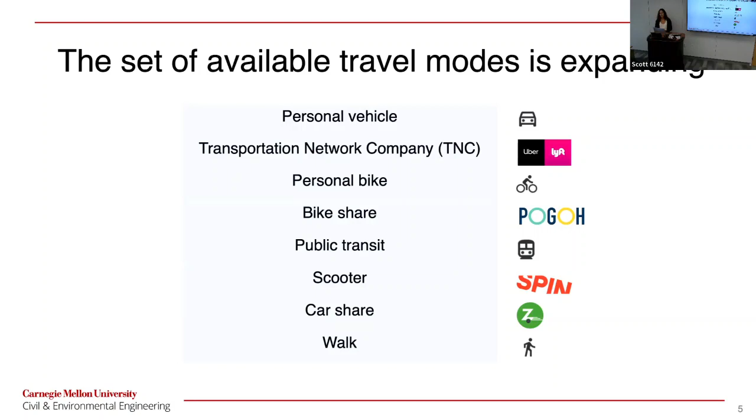In general, I think we can all agree that our decision to take one mode versus another reflects cost trade-offs. For example, you might think, what is the monetary cost in terms of dollars? Many times I would love to take an Uber or Lyft back from the airport, but it's expensive, so I don't. I take transit. But transit's not necessarily often reliable.

You're wondering when you decide to take PRT, well, will it come on time, and will it be too full in the winter? Sometimes you may also want to bike or take a scooter, but you may be worried about the risk of the path. So in general, for this research, we said, well, a traveler considers 5 cost considerations, those being travel time, the price, the risk, the reliability, and the discomfort. And then, each one impacts your mode choice differently.

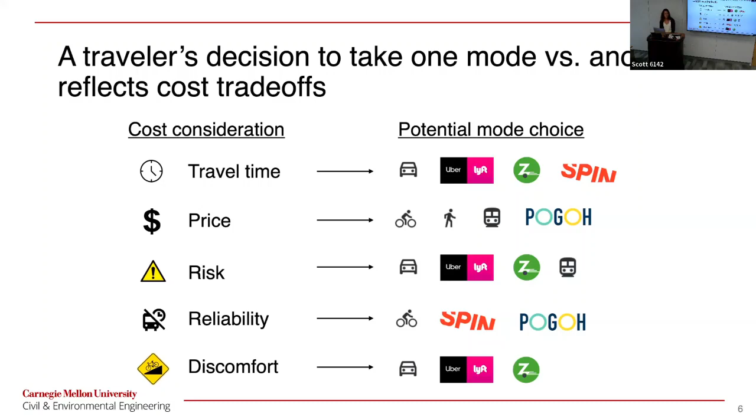Okay, so the objective of minimizing total cost can lead to the construction of multimodal routes. So here we have a contrived origin-destination pair. We have Hazelwood Green in the bottom, going up to Mellon Park. So we have different cost trade-offs. So a potential multimodal route, let's say you're down here at Hazelwood Green. If you actually try to go to Mellon Park by public transit, it's not a good option. You'll have to transfer bus lines, and the whole process will take you 45 minutes on a good day.

Well, what if there's a bike share station nearby? You may want to solve your first mile problem by taking a bike share, maybe biking a mile or two, and then getting on public transit for your final segment. Alternatively, you could take transit for the early segment and then a Spin scooter to your final destination, or no transit at all, maybe taking something like a Spin scooter to a Zipcar. So these are just possible multimodal routes that can be considered.

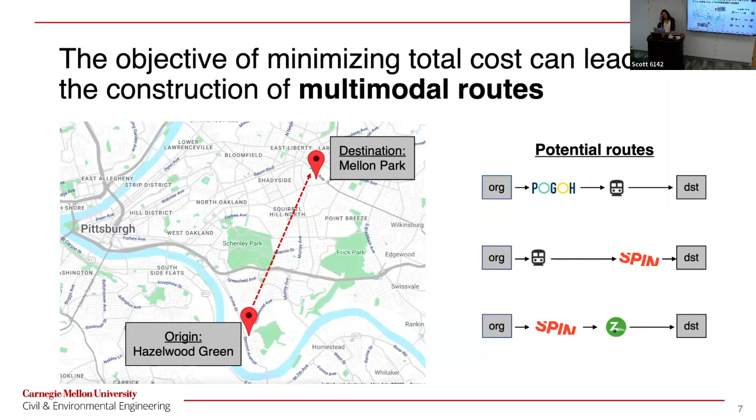But the issue is that real-time routing is typically conducted for single mode, single cost travel. So single mode being one travel mode, whether it's car or transit or biking. Single cost being just travel time, so not considering all of those other costs that I had mentioned previously. So here's the familiar Google Maps interface. So if you want to go from Hazelwood Green to Mellon Park, you have to choose which mode am I using. So here, let's say you selected the private vehicle.

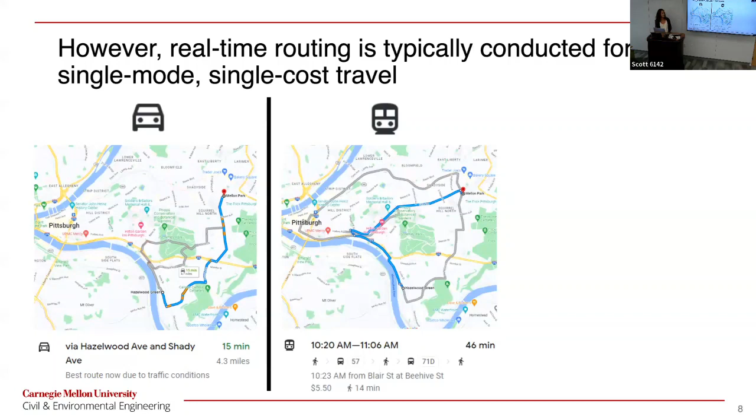Well, it returns a route to you that takes 15 minutes, so it's optimized for travel time. Alternatively, you could select public transit, and it shows you what seems to be a rather inefficient route, but you are constrained by the PRT's network structure. So it triples the travel time relative to private vehicle, or you could select biking, and it also gives you a route.

So moreover, previous accessibility research considers single mode, single cost, single time of day travel. So accessibility metrics aim to capture how well a city's transportation network facilitates access to important destinations. So one such metric that's very commonly used in practice, because it is quite interpretable, is called this cumulative opportunities metric. So here's a map of the Pittsburgh neighborhoods. We'll say we're just considering one neighborhood center, the red star. And then we have various points of interest around.

So if you want to know how accessible are these points of interest, what this metric will do is you say, okay, well, you're a transportation planner. You have to set a travel time threshold, let's say 20 minutes. And then you count the number of, quote, opportunities reachable within the travel time threshold. So let's say these black markers are jobs, and your travel time threshold is 20 minutes. Well, then the cumulative opportunities metric of accessibility to jobs for this neighborhood center is 1, 2, 3, 4, 5, 6, 7, 8. So very, very simple metric to calculate, and like I said, for that reason, it's often used in practice.

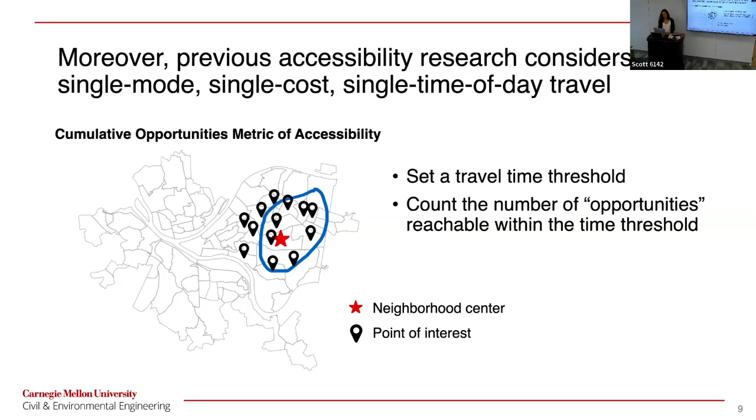So that said, we want to try to evaluate accessibility in a multimodal network. Our research objective is to develop a multimodal network modeling framework to measure accessibility that considers a diverse set of time-dependent travel costs and travel modes. So a lot of words there, but what we're trying to do is develop this model that considers all of these travel modes at the same time. So develop a model that allows for multimodal routes, considering bike share, scooter, TNC, or transportation network companies. Considers these 5 travel costs: the time, price, risk, reliability, and discomfort.

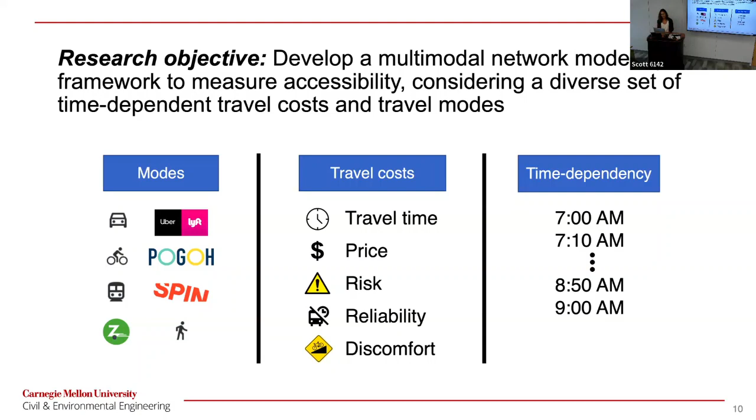And then evaluates accessibility at many points in time. So oftentimes you see accessibility just measured at 8 a.m. or peak morning, or at 5 p.m. peak evening. So we want to do this at almost a continuous time. So hopefully that was properly motivated why we want to develop this model. Now I will show you how we actually do that. So I'll start with some steps, and then I will show you some images.

So steps for designing this network model. So first we build unimodal graphs for the study area. I will show those soon. And then we will connect these graphs by transfer edges to build what's called a super network. That's a routable multimodal network model.

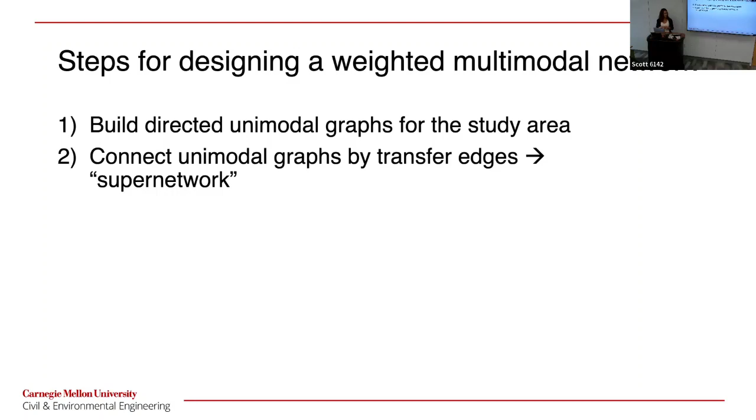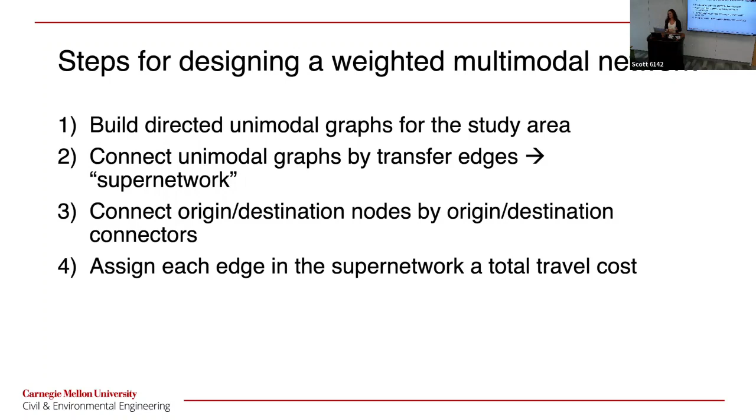We will connect our origin destination nodes to the multimodal network, and then assign each edge in the super network total travel cost. So the point is, after we complete these four steps, we should have a multimodal network model such that you can query any origin destination pair, and you will be able to find a multimodal route that potentially traverses many travel modes and is optimized for a total travel cost that considers factors other than just travel time. So let me show you what this looks like.

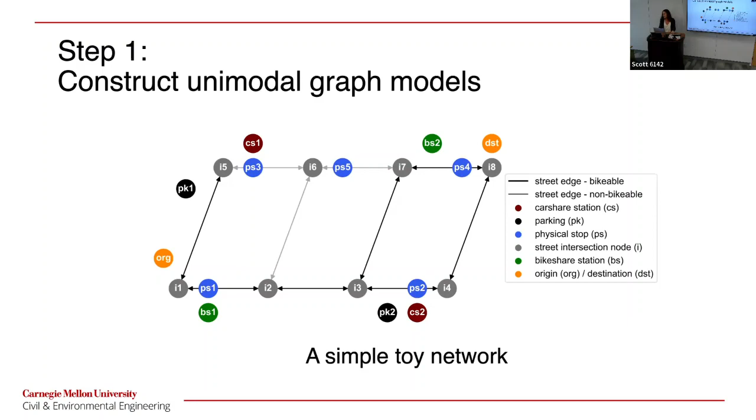So let's start with the personal vehicle network. In the personal vehicle network, your only special nodes are the parking nodes. You're going to use the regular street intersection nodes and street edges to drive, and the only special ones that you might use are the parking network nodes. You're not going to use a car share station. You're not going to use a bike share station node. So we have built out the personal vehicle network.

For the car share network, you also might want to park the vehicle, but you also have these car share nodes. So what we do is we connect these car share station nodes and the parking nodes to their nearest intersection nodes. Why do we do that? Well, if you don't have a connection between the intersection and the parking, then you cannot access it on the graph. It's not what we call routable. You cannot get from point I6 to parking 1 if this network link does not exist. So that's why you have to build out these connections.

And then we have the Uber Lyft, which does not have any special nodes. The transit one, I'm not going to get into that. It's a bit more complicated, the reason being that many routes use the same bus stop. And we have to be able to model it such that you can transfer between, let's say, the 61A and the 28X at a given point.

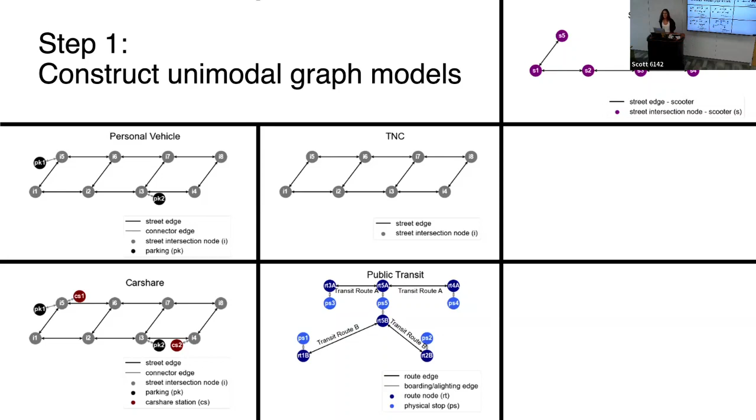We have the scooter graph. The reason that those top edges are not included is because we said those edges are not bikeable. For example, they might be highway edges, and you cannot use them. And personal bike, same thing. And then bike share is very similar to the car share one. So our special nodes are the bike share stations. And again, we build out these little connections such that you can go from the biking network to the station nodes. So at this point, we have all our unimodal graph models.

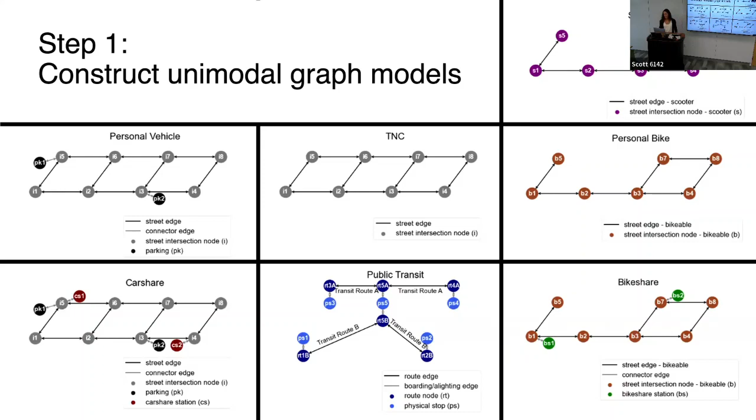You can imagine them as layers. So what we're going to do is connect them by what we call transfer edges. So here is a super network model that includes some transfer edges and the origin destination connectors. I only considered 4 modes here. I didn't include all of the other modes because the graph super network gets very messy. So let's just say we're thinking about TNC, which is the Uber Lyft, transit, bike share, and then also the walking mode.

So we have layer 1, layer 2, layer 3, and then we connect them at logical points. For example, the transit network is connected to the bike share network by connecting a bus stop to a bike share station, because you can only access the bike share network by transferring to a bike share station.

The public transit is connected to the Uber Lyft network. Sorry, if you're going from the transit network to the Uber Lyft, you go to the point nearest your bus stop, because logically you would ask your driver to pick you up at the point in the Uber Lyft network that is nearest the bus stop. And then we say all of these transfer edges are traversed by walking. That's why the walking mode is invoked.

So we also include our origin and destination. Those are the orange points. And we connect, for example, the origin to all bus stops within, let's say, half a mile. Or similarly, all bike share station nodes within half a mile. And same thing with the destination.

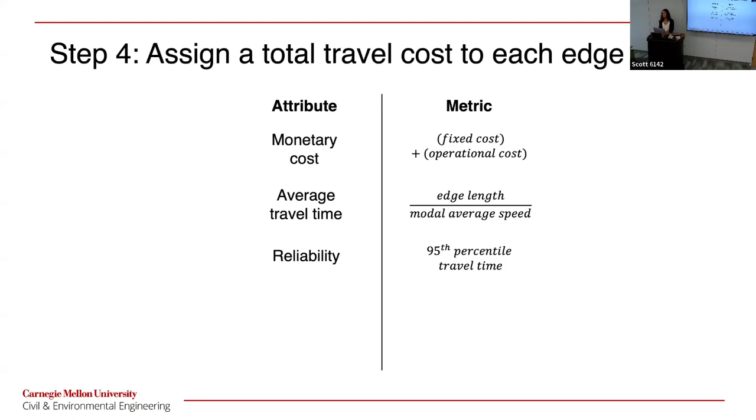The average travel time, we'll say is the edge length divided by the average speed you're going with the mode. Unless you're in transit, then we'll just use the publicized schedule to figure out the travel time. The reliability, which we measured as the 95th percentile travel time, that's typically used as a metric of reliability.

The risk we defined as the crash risk, which we were able to calculate by calibrating it using previous crash data. And then the discomfort, which we were able to look at the literature and find some survey data that asked people, what is your comfort level using these various travel modes, such that we could calibrate a discomfort index that we multiplied by the edge length.

So now we have all of these attributes for each edge. So what we're going to do is assign a weight to each one, and then add them up and get a total travel cost. So the weight of each one is interpreted as your value of the cost component. So for example, W2 here would be your value of travel time. The point of that being, well, now you can compare all of these on the same scale.

So if you have value of travel time times average travel time, now you have some monetary value, which can be compared with monetary value up top. Similarly, you can have a value of reliability times reliability, and you get out a dollar amount. So now we have everything on the dollar scale, and we can add them up to get a total travel cost on each edge, such that we can appropriately optimize a route.

So this is what Google Maps does, but my intuition is that they return you a route optimized for only travel time, as opposed to all of these other cost considerations. And again, only a single travel mode.

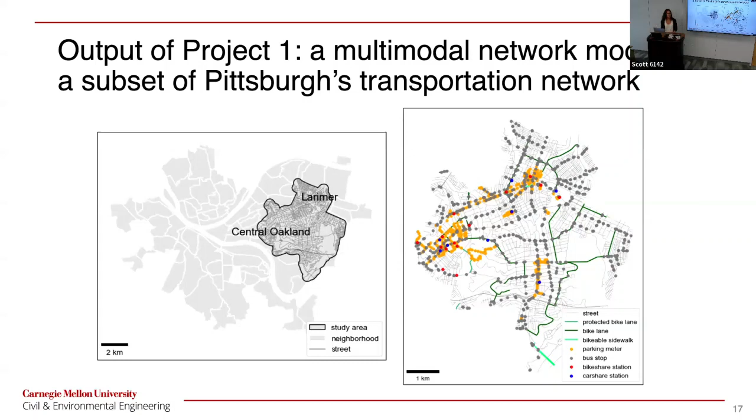So this should look very familiar to that small toy network I showed. That small toy network only had a few nodes. This has a lot of nodes, but we can apply the same process to build out the multimodal network. So that was the output of the first project, which is good, because now we can do all kinds of analysis.

So now we will go into the second project. So I will be using that multimodal network model to optimally design a mobility subsidy program in Pittsburgh.

So what are mobility subsidies? Well, they're a monthly monetary credit provided to eligible residents to be used on a combination of travel modes. So you could think of this as similar to SNAP benefits. SNAP benefits provide food assistance to residents in need. Mobility subsidies provide transportation assistance to residents in need.

So these mobility subsidies are enabled by apps such as the Transit app. Many of us use that. The Transit app allows us to pay for different modes of travel using one payment platform. So you can actually pay for a bike share directly in the Transit app the same way you could pay for a public transit pass. So that's what these are.

Are they politically viable? I think it's an important question to ask before we embark on our research. Is this actually implementable? So this was an important question to me, so I started digging in. You might recall this first headline. So Pittsburgh actually did pilot a guaranteed basic mobility program. A few cities have done so. What Pittsburgh did is they gave unlimited access to 50 residents. So not just transit access, they also gave unlimited scooter and bike share and a monthly allocation for a Zipcar.

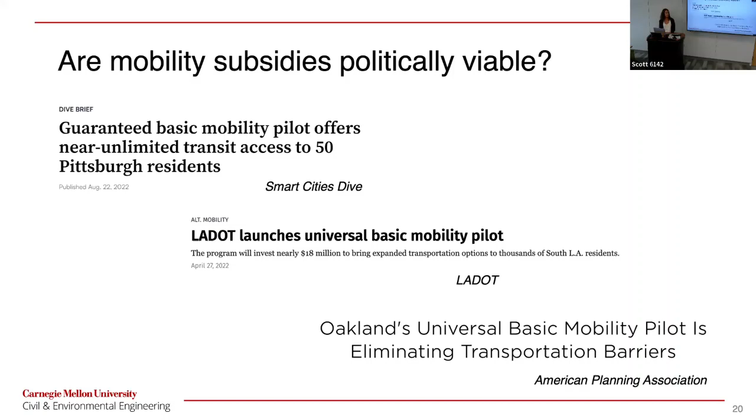So let's see, how can we formulate this? Let's talk about the framework for this optimization problem. Our underlying assumption here is that, let's say, a city has a fixed budget to be used on mobility funds for residents in need. Again, we can equate this to the SNAP benefit program. There's a fixed budget and cities must allocate accordingly. So we'll say that the program stipulates that all eligible residents are provided with a bus pass.

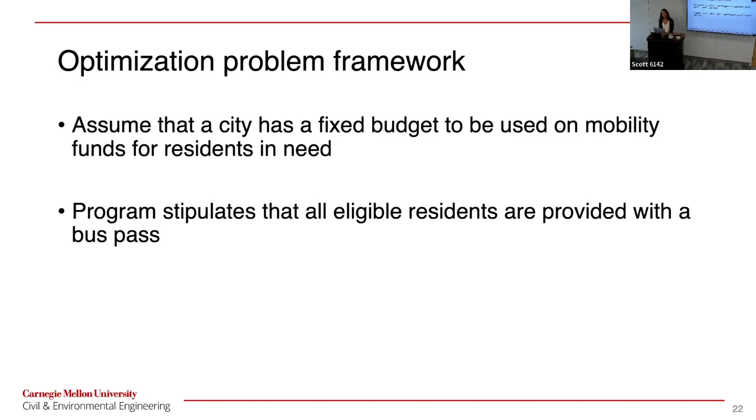Why? Well, preliminary results from Oakland's experiments show that most of the rides used for their mobility subsidy program were actually taken on transit. And I think it's widely understood that transit is the backbone of any transportation network. So then the question becomes, now you have a remaining budget, how should you allocate it? Once you give everyone their monthly bus pass, you might have, let's say, $20,000 or $50,000 remaining. What should we do with it?

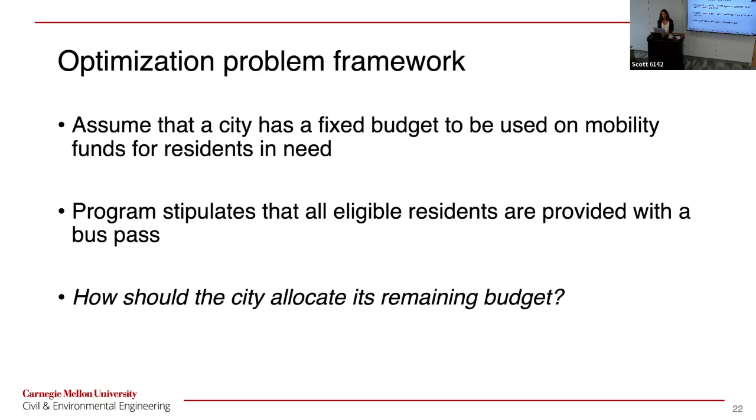So here's a simple option. You could allocate a subsidy equally to each neighborhood. So here at the Pittsburgh neighborhood level, you could say everyone gets $25 a month, or $25 a day, whatever is possible. Advantage, that is probably the easiest solution to implement. Disadvantage, it's probably not the most equitable solution.

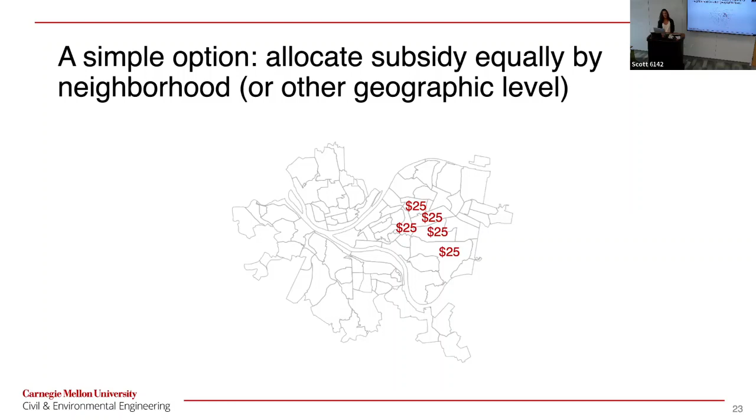Why? Well, any of us who have been down by the river know that transit is not so good there, versus many of us who might live over in Squirrel Hill and Shadyside know that the transit network is much more robust in those areas, and it's quite quick to get downtown. So our thought is that if you have very robust transit, you might not need as many additional mobility credits to solve the first mile, last mile problem.

So our proposal is that you can allocate the subsidy differentially by neighborhood or other geographic level, say census tract or census block group, whatever you think is reasonable after consulting with policymakers. So in this solution, it might be, this neighborhood gets $10 because they have very good access to downtown or job centers in general. Whereas down here, less robust transit might need a $40 credit per month, per week, per day, whatever.

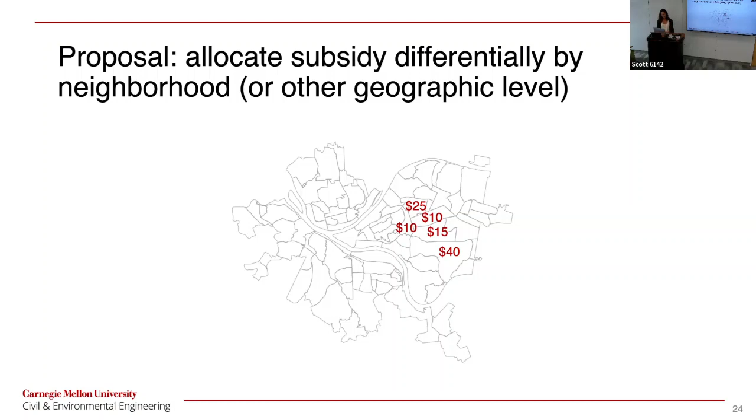So this, I think, is unequivocally a more equitable solution because it compensates for neighborhoods with poor transit options. The disadvantage being it is potentially more difficult to implement, but that has not stopped us before, so we're going to try it. And I will propose a method, and then hopefully at a later date, consult with our stakeholders and policymakers about how to actually implement this properly.

So here's a quick primer on mathematical optimization problems. What these look like is you say you're going to minimize some function, f of x, over all values of x. So you're going to choose this value of x that minimizes your function, f of x, subject to some constraints. So again, this is your decision. This is what we're going to decide. We're going to choose x to minimize or maximize, in our case, an objective function, f, subject to some constraints that you have to abide by.

So when I actually explain our program design, I'm going to skip the equations, but I just want you to know that this is what is actually going on. So I will just explain conceptually how do we define our objective, our decision, and our constraints in the context of this problem.

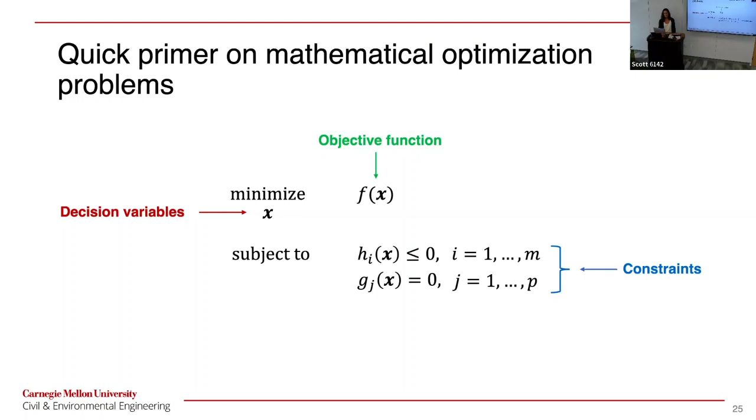So our decision is the monthly subsidy allowance per neighborhood or other geographic level. So we'll say if a person takes n work trips per month, this can be thought of as a single work trip subsidy. For example, let's say we decide residents of this neighborhood should be allocated $100 monthly. We have 20 monthly work trips. It turns out to be a $5 per trip subsidy on average.

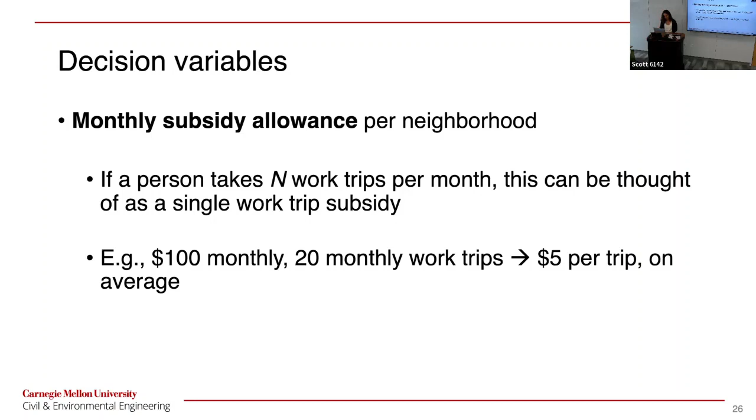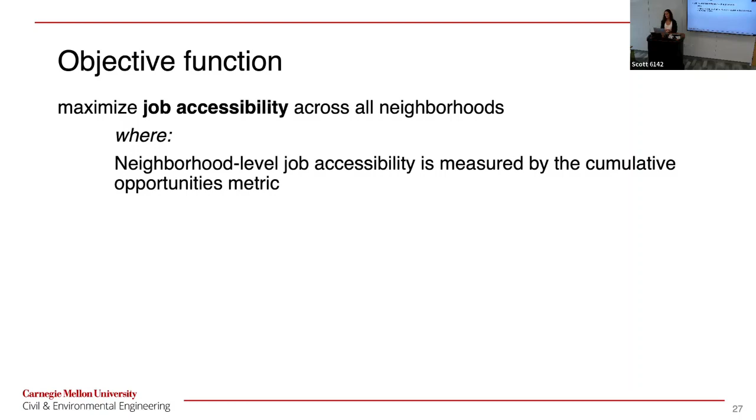The objective is that we want to maximize job accessibility across all neighborhoods, where job accessibility on the neighborhood level is measured by the cumulative opportunities metric, which I described in a previous slide. I will return to that in a second. So this is what we're trying to do. We want to allocate a mobility subsidy such that we improve access to jobs for residents across all neighborhoods in Pittsburgh who need some transportation assistance.

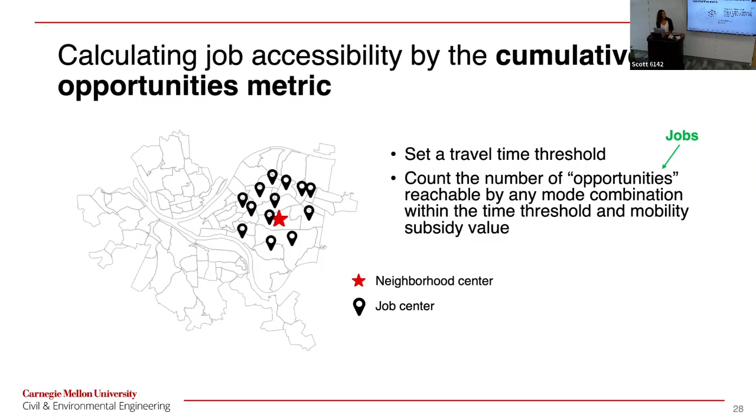Okay, so how do we calculate job accessibility by the cumulative opportunities metric? Well, we have this familiar picture. Hopefully it's familiar. So we have Pittsburgh neighborhoods. Let's just consider one neighborhood right now, the red star, and then all of these jobs denoted by these black markers. We're going to set a travel time threshold that can be determined by policymakers, stakeholders, 20 minutes, 30 minutes, whatever is decided to be reasonable. And then you're going to count the number of opportunities, jobs in this case, reachable by any mode combination within the travel time threshold and the mobility subsidy value.

So, for example, we might say this neighborhood can access 1, 2, 3, 4 jobs by transit within 20 minutes. Well, what if they were to receive a $5 per day per trip mobility subsidy? Now it turns out they can access an additional 1, 2, 3, 4, 5 jobs because they can use a bike share, perhaps, to solve the last mile problem. So this is how we connect the objective function to the decision variable. With a greater mobility subsidy, this blue contour expands outward to the gray contour, so you can achieve greater accessibility to jobs.

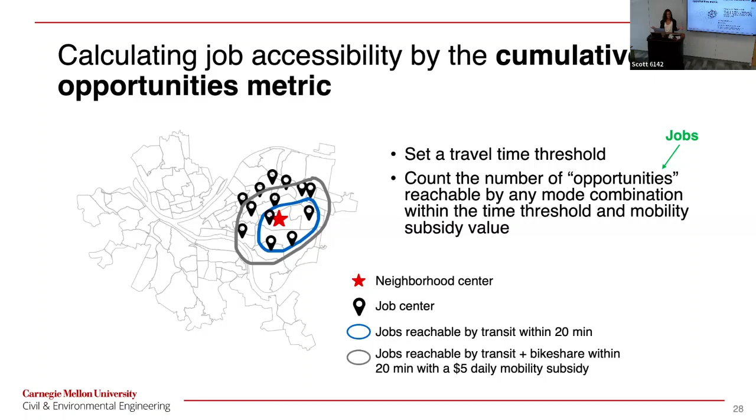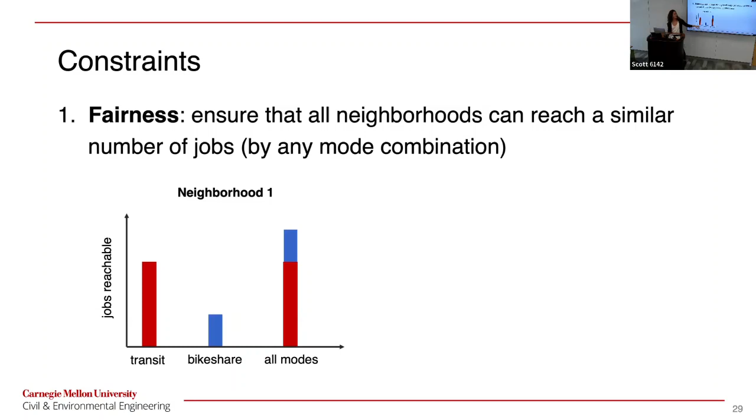Okay, and then some constraints. So we have a fairness constraint. This is part of the motivation. We want to ensure that all neighborhoods can reach a similar number of jobs by any mode combination. So let's say we're considering neighborhood 1. We have jobs reachable on the y-axis, and the mode type on the x-axis. Neighborhood 1 has pretty good transit access. They can reach a good number of jobs. And then we give them some mobility subsidy, and they can reach an additional number of jobs by bike share or by some combination of transit and bike share, such that we have a total number of jobs reachable.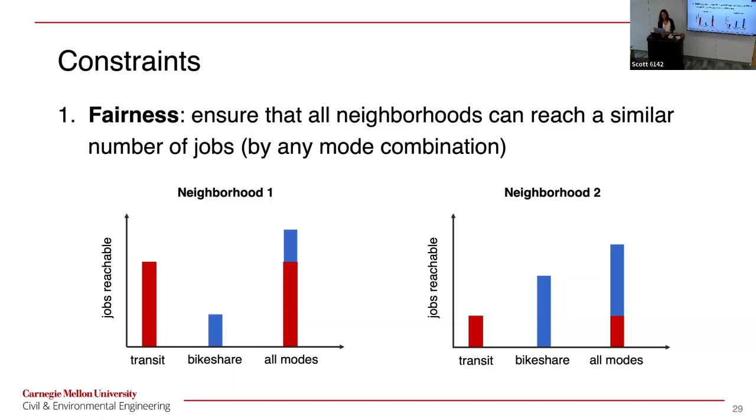Then we have a second neighborhood with poorer transit coverage, so they might need a larger mobility subsidy such that they can reach a similar number of jobs. So what this constraint effectively does is it forces higher allowances for neighborhoods with poor transit. And then we have a classical program budget constraint. That says that the monthly allowance, when we aggregate it over eligible residents and neighborhoods, cannot exceed the program budget.

So now we've hit the 3 components: our decision, our objective, and our constraints. I'm just going to very briefly flash over this. I don't even want you to look at it. But the point of this slide is just to show that we have to implement all of those words in equations, and then we will put the equations into some solver, and it will return us an optimal solution. So real quick, we have minimize accessibility weighted by population, then decisions and constraints, and then we have all of our parameters defined.

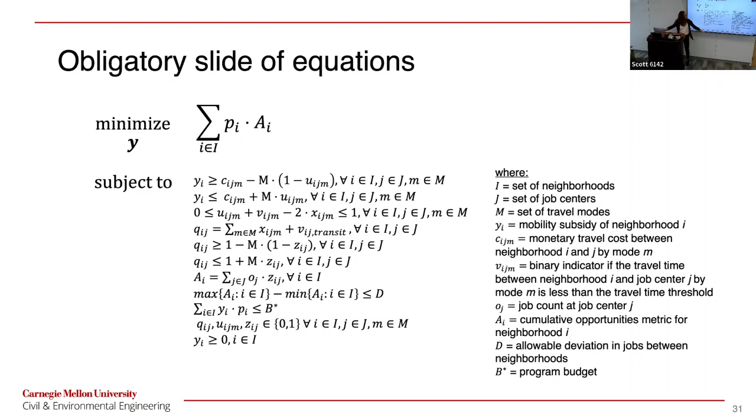Okay, that's great. So that's what I did. I took those equations, I wrote them into some Python solver, or there are other packages you could use, and then I got some results. So I tested this on a toy network.

I'm in process of converting it from my little toy network to actual Pittsburgh, but I wanted to see if this could actually work on something small and interpretable. So I made this network. It's 4x4. I said, here are some neighborhoods.

So each dot or node is a neighborhood that doubles as a job center, and I have the population of each one and the number of jobs available. And then I have their connections. So I just simulated the travel time and the monetary cost by travel mode between each neighborhood and each job center. I just made it up using some reasonable intuition.

And then I assigned neighborhoods 1, 7, and 13, these ones in red, as bad transit. So what does that mean? Well, since I simulated the data, the travel time between neighborhoods and jobs by travel modes, I simply added some travel time value to all transit paths originating from these neighborhoods.

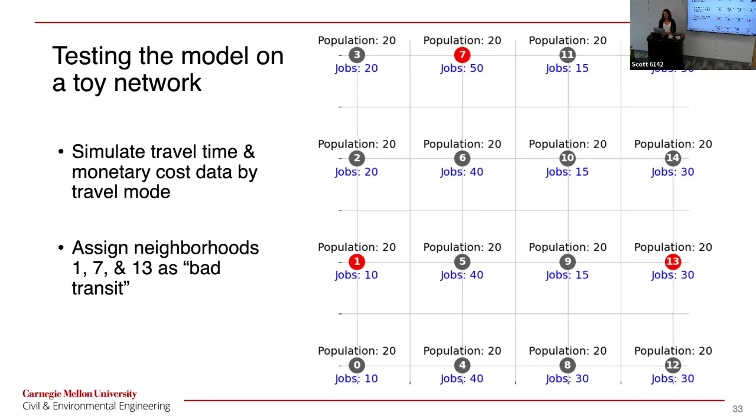Because I wanted to see if this is implemented properly, the idea is that neighborhoods 1, 7, and 13 should have a greater mobility credit. So that's what should happen. Turns out it did happen. So what do we have here? Well, on the x-axis, we have neighborhood number. And then the y-axis, the jobs reachable. So this is the objective. The objective is the number of jobs reachable and the optimal solution.

So in blue, you have the jobs reachable by transit. Recall that in this program design, everybody was allocated a transit pass. The problem is the number of jobs reachable by transit for 1, 7, and 13 is 0, because the cumulative opportunities metric requires you to set a travel time threshold. So you can't actually reach any jobs within the travel time threshold originating from these neighborhoods 1, 7, and 13.

But what we see is that they were assigned a mobility credit such that they can now access a lot of jobs using other modes. So that's the orange line. For example, neighborhood 5, pretty good transit access, also received a small mobility credit such that their number of jobs reachable increases even a bit.

Notice, despite the constraint I had of fairness, there's still some discrepancy. It's because, if I wanted to set the constraint such that they all must reach the exact same number of jobs, I could do that. The problem is, the problem would become infeasible. It's not possible to solve because of the underlying network structure. Some places, like neighborhoods 5, 6, 9, and 10, exist in a good spot in the network, and they have good transit coverage, so they can simply get to more places. Okay.

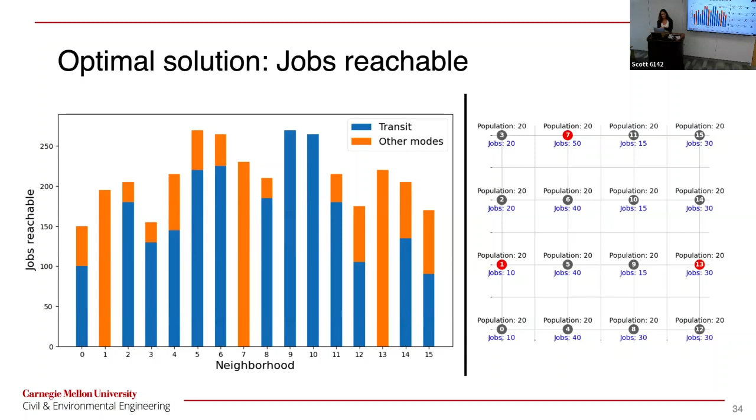And then finally, we have the optimal solution of our decision, which was the mobility subsidy. And we see neighborhoods 9 and 10 actually not even provided a mobility subsidy. They're at very good spots in the network, good transit coverage, and they don't actually need additional credit.

Notice neighborhood 0 and 15, despite not being assigned bad transit, still have a pretty high mobility subsidy. The intuition there is that they exist in the corners, so they don't have robust job access, whereas 5 can go kind of anywhere nearby. 0 is a bit constrained. There are no jobs over here. So they need more of a subsidy to reach additional places in the network.

So ultimately, this gives us a sense for the gaps in the transportation network infrastructure, which can ultimately inform future network investments, which I hope to do in another project. So next steps, expanding the set of possible mode combinations. I want to include all the modes in this multimodal network model. Extending the methodology to a real transportation network. So again, that's what I'm currently working on.

And then consider accessibility to other services. So this model, the objective was just to maximize accessibility to jobs. Jobs is typically used when evaluating a transportation network's accessibility. But it would also be useful to consider other services such as healthcare or schools or parks, anything that would make a city function well.

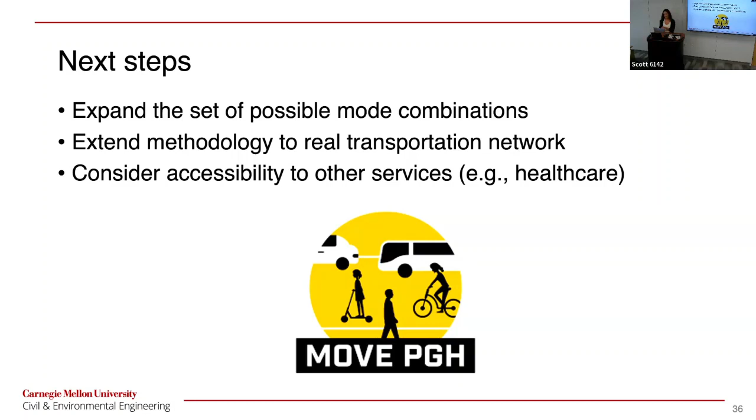So that said, I will conclude my presentation, hopefully right on time. I would be happy to take any questions. Yeah. Oh, yeah.

Yeah, I was wondering, it's time and cost to get to your job. And a lot of jobs for service people exist in the suburbs. And I know from experience, there are people who travel from downtown Pittsburgh out to the suburbs, which could take up to an hour to get to work. Yeah. And then I assume that to get to downtown Pittsburgh, they're coming from someplace else in Pittsburgh to catch the bus out to the suburbs.

Okay. So what I'm wondering is, do you look at the wage differential between what they pay in the suburbs versus what they pay in the city to make it worth their time and effort to go out there and travel maybe an hour and 15 minutes, maybe an hour and a half to get to and back again? Yeah, I see. So here in this toy network, I have just the number of jobs equal to 10, number of jobs equal to 40.

So what I intend to do there is to look not just at the strict number of jobs, but look at the type of jobs and weight them accordingly by wage. But nothing's been done yet about that.

I'm just curious, because I see people on the bus who travel an hour to get out there to their work, and I'm wondering, are they getting paid enough to make it worth their time to travel? I guess if they take the job, it must be, but, you know, if the employers out there have to pay more to get people to come that far in that amount of time. Wait, so then what are you asking? Well, I just wonder if anybody's looked at that. Oh, if anyone's looked at it.

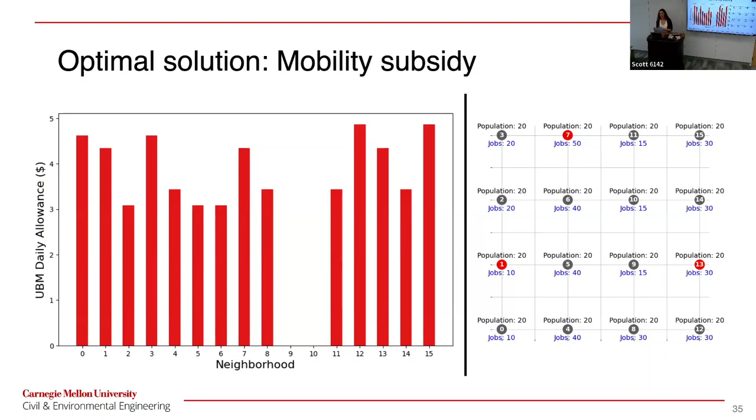Yes, Rachel. I have a question. For this second part of the mobility subsidy, is there any thought you're putting into whether a person is physically able to bike? Once you add in the multimodal component, someone may physically not be able to use a part of that network. Correct. Yes, that's a good point that I brushed over. So yes, we can do that.

So the same way that our decision is the mobility subsidy by neighborhood, you could also do it by neighborhood and by population group, such that perhaps one population group, maybe disabled or elderly, can use only transit and Uber Lyft. So I think that would be a proper way to address that question.

Yes. I have a similar question, but it's more about time of year and weather. Could we distribute subsidies differently in the winter and summer? Yes, you could. What you would have to do is change the travel cost, because remember I have discomfort as a travel cost. That was intended to encapsulate factors such as weather, or biking uphill, or reliability, when the bus comes but doesn't pick you up and just passes you. So we would have to change the travel cost and then run it again, which you could do.

More of a clarifying question, but would these subsidies be applied by neighborhood or by the individual and what their costs are? Yeah. I think the best we could do for the individual is what Rachel had mentioned, by population group: which modes are you physically able to use? As opposed to individual preference, which I think would start to get really messy.

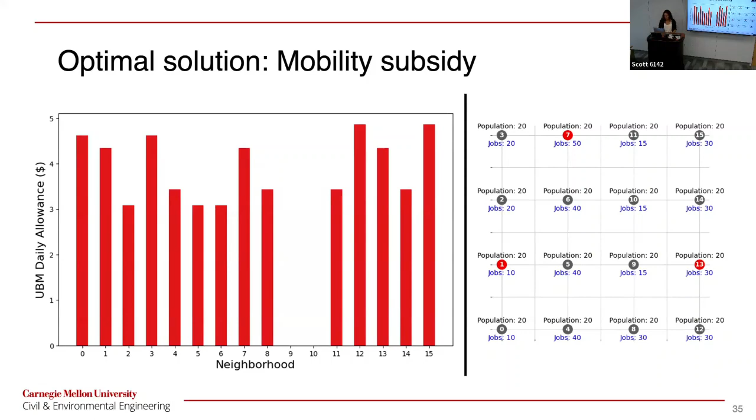Oh, sorry, one more question. Is there a way to quantify or consider the friction that might exist between different modes of transportation? For example, a Pogoh bike station might not be next to a bus stop. It might be two blocks away, and you have to walk through a narrow sidewalk or something like that. Is there a way to factor that in?